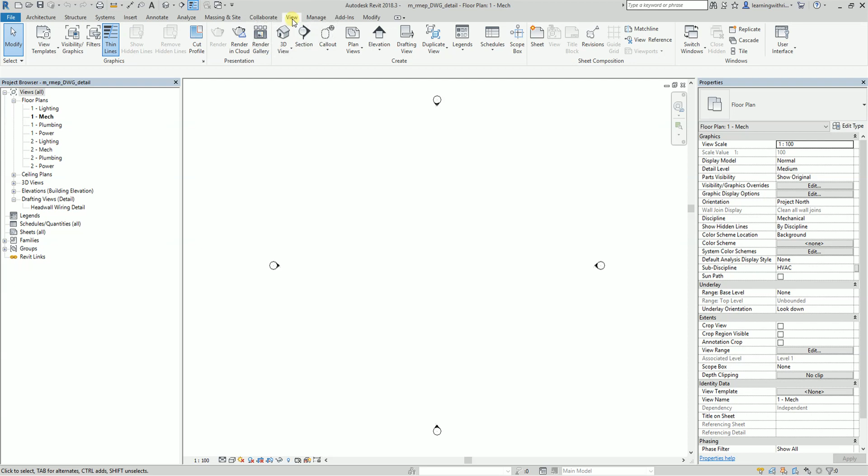But before we start, we are going to create a drafting view first, since we are going to import drawing details that we will use for detailing. To properly use that, you need to create a drafting view. Go to the View tab and select Drafting View. It creates a view showing details that are not directly associated with the building model, meaning any changes you make on the drafting view will not affect your 3D model, and vice versa.

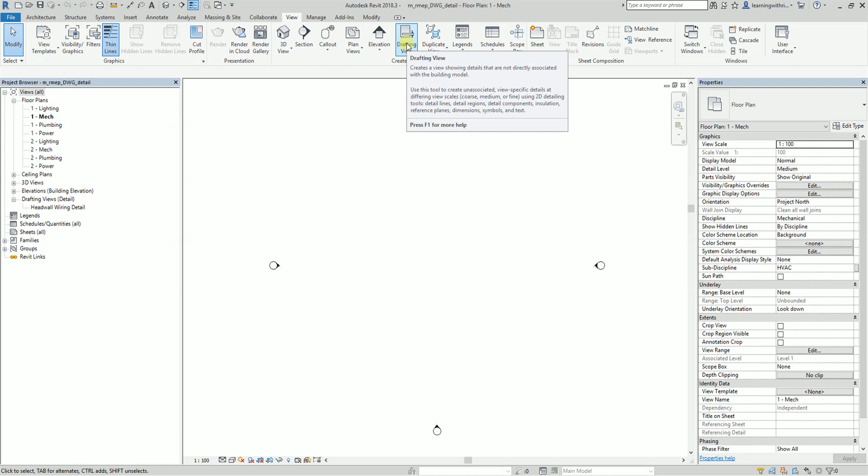Since you are going to use this CAD file to create a detailed view, you need to create a drafting view. I'm going to select Drafting View and specify the name. Let's call this HVAC curb detail, and select OK. Now you see the drafting view for HVAC curb detail.

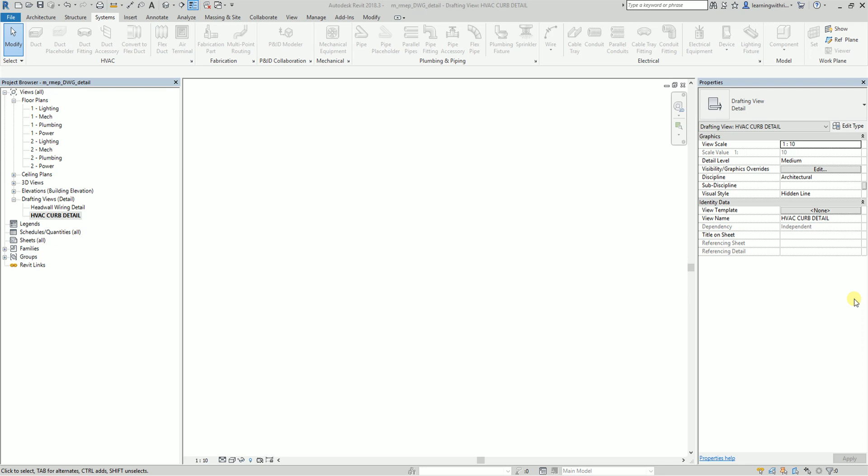You will also notice that if you go to Architecture, Structure, or Systems, all the 3D modeling tools are disabled, because drafting views are only a 2D drawing. So you will not be able to use your drafting view to create a 3D model. That's the reason why all the 3D modeling tools are disabled.

Now let us start importing our CAD drawing. You just need to go to Insert, then select Import CAD. Let's say this is the drawing that I'm going to use. But before anything else, before you select Open, I want to discuss the options we have here below.

When you say Current View Only, you will only see your CAD drawing on the current view—if you check this, you will only see your AutoCAD drawing on your drafting view, not in other views. If you uncheck this, you will be able to see your AutoCAD drawing not only on your current view but in all views, like section view, elevation view, and 3D view. Since we only want this on our detail, I'm going to check this one, so I only show this CAD drawing on my current view.

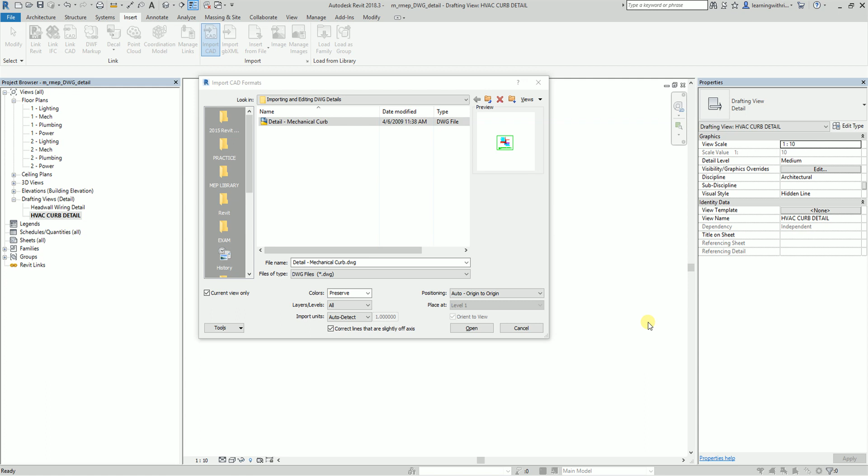Colors—it's up to you if you want to change your colors. You can select Invert: dark colors become light, light colors become dark. Preserve will keep the color of your AutoCAD drawing. Black and white will make your drawing black and white. For this exercise, I'm going to use black and white.

Black and white. There you go. Oh, by the way, before I import my CAD drawing, I just want to do this one.

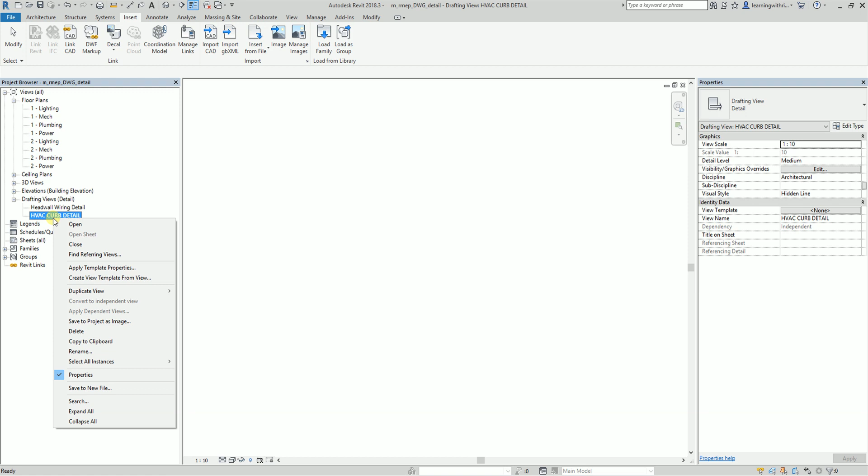I'm going to right click the curb detail here, and then apply a template. Let me just apply here a view template, apply template properties. I'll use the detail here, then select OK.

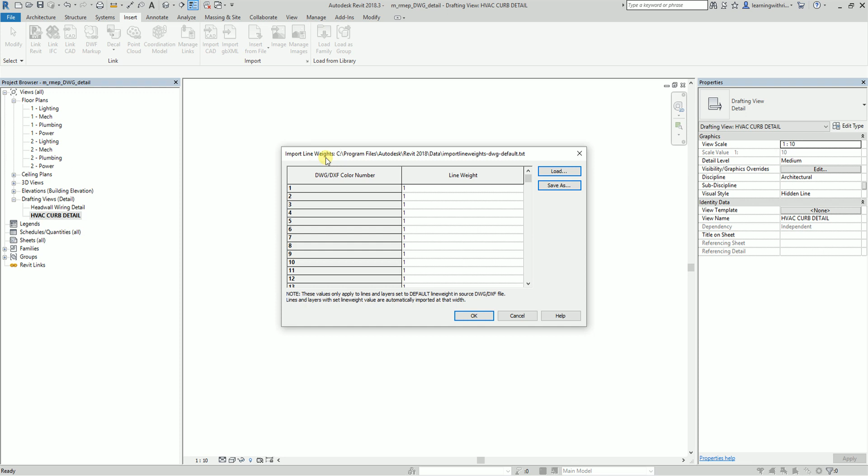After that, from the insert tab, there is this option here. If you click this arrow, it will expand your panel. If you click that, it will open the import line weights. From here you'll be able to import line weight to your Revit.

For example, for color number 5, I'm going to enter the line weight, let's say 4. This line weight equals to 0.3 mm at the scale of the new drafting view.

I'm going to select number 4, and then select save as. The reason why we are saving this is just in case you want to use this line weight again in another drafting view, you can load it. So if you save this, you can load this line weight again to another drafting view and another CAD file.

I'm just going to select save as. Let's say I'll save it here, and call it AOTC or whatever name you want, in case you want to save the import line weight file.

It's read only. I'll just close this, probably save it on my desktop. I'll save it here as AOTC, then save. After that, I'm just going to select OK.

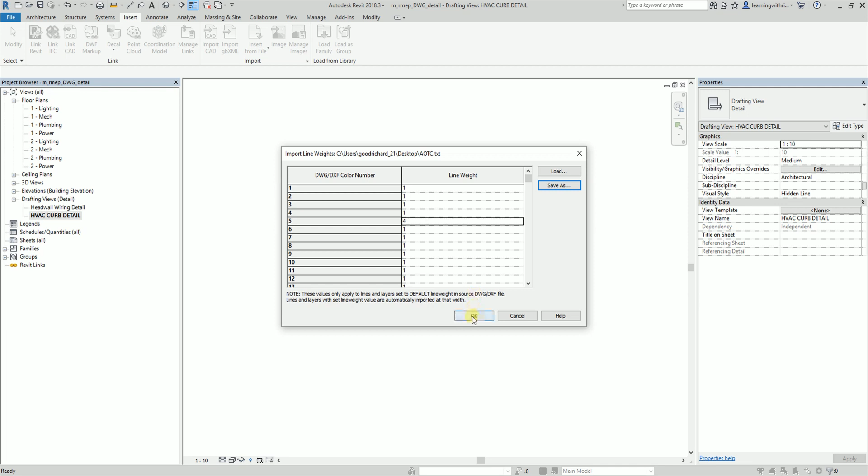After that, I'm now going to proceed importing my CAD because, like what I've said, you will be doing this also on the examination. You need to be familiar on how to save a line weight, and what options you are going to use in importing.

Okay, so let's now proceed on importing. I'll just go to the exercise. Where is that? This one. What's that chapter again? Chapter 4. All right, chapter 4, this one.

So black and white. I'll just put it on the current view, at the center. So auto center to center. All right, I'll select auto center to center.

After that, I'll need to select open. By the way, when you say auto center to center, it means it places the drawing or the imported file at the center of the Revit MEP model. The center of a Revit MEP model is the center of the bounding box around the Revit MEP model. It will just place it here at the center.

The other one is auto origin to origin. It allows the Revit model that you import and the model that is created to share the same origin. This is useful if you are importing a plan, a floor plan. But since this is just a detail view, I'll select auto center to center, and then select open.

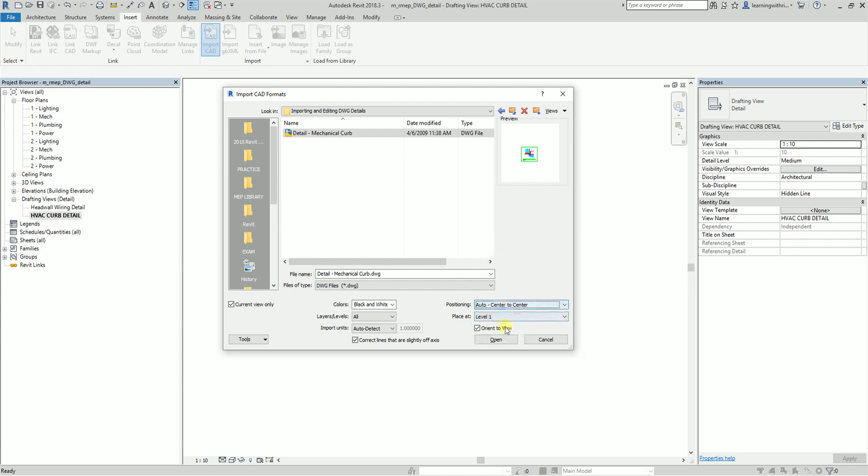Right. So after importing, that's it. After you import your CAD drawing, as you can see, it's now here and it's black and white, because that is what we have selected.

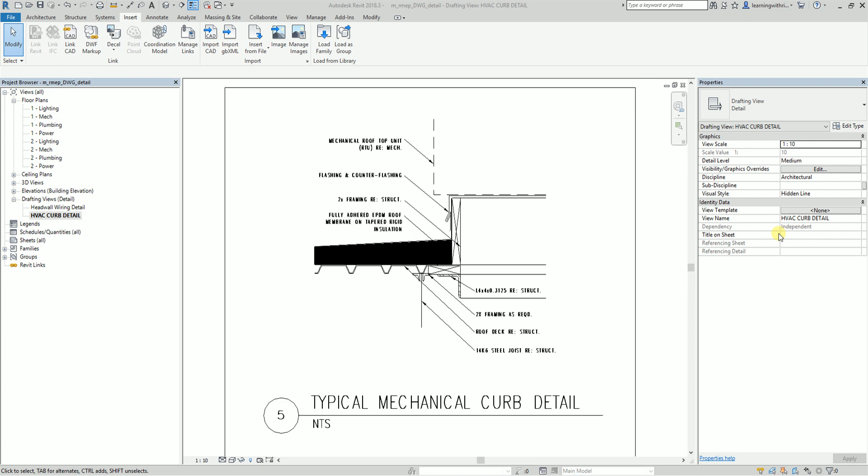Notice that the leader lines in the AutoCAD file retain their defined line weight when imported to Revit. Before importing, if you remember the AutoCAD file, we specified the line weight for elements on layers with blue color. Therefore, the steel joist and flashing in the import symbol are slightly thicker than the leader lines and much thicker than the other lines.

So for us to be able to see that, I'm going to turn off the thin lines. There you go. You see, this is the one that we have changed a while ago.

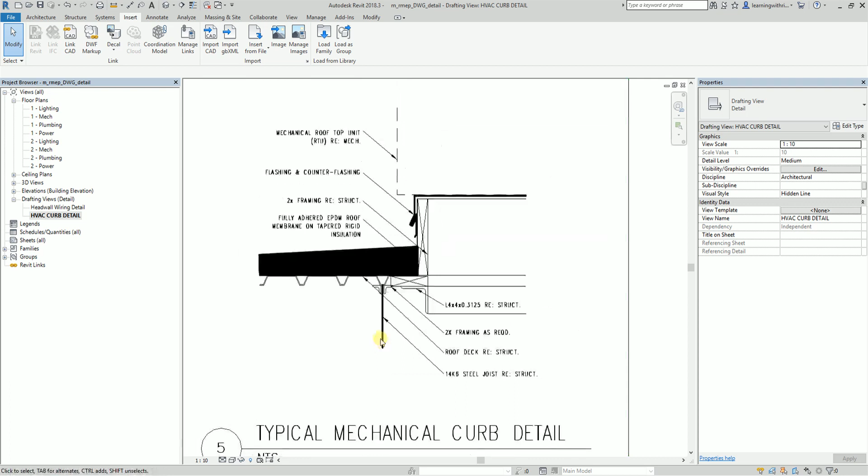This is color number 4. We changed it to 4, that's why it was applied here. Remember this one, right? We make the color number 5 into 4. That's why you see this is the one.

The steel joist, which is this one, as well as the flashing and counter flashing, are slightly thicker than the leader lines and much thicker than the other lines.

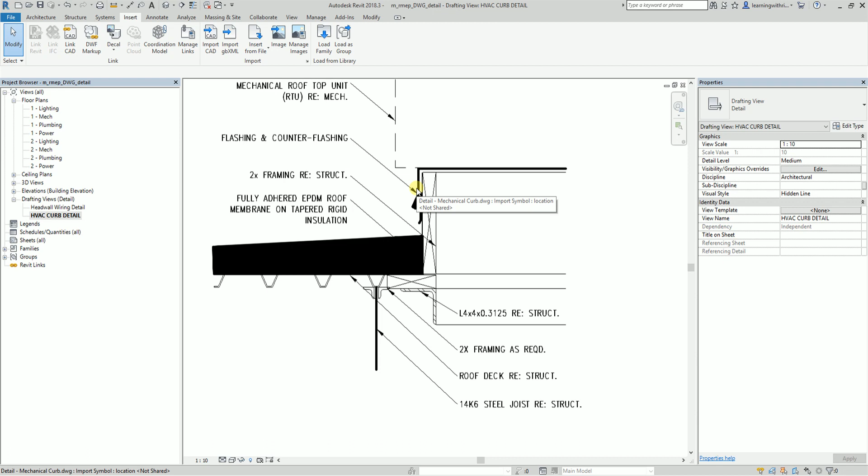Now let us try to do some editing on our drawing details. If you want to do some editing, what you can do on the examination, there's this question that will ask you what is that particular layer. Let's say you want to know what is the layer of this line.

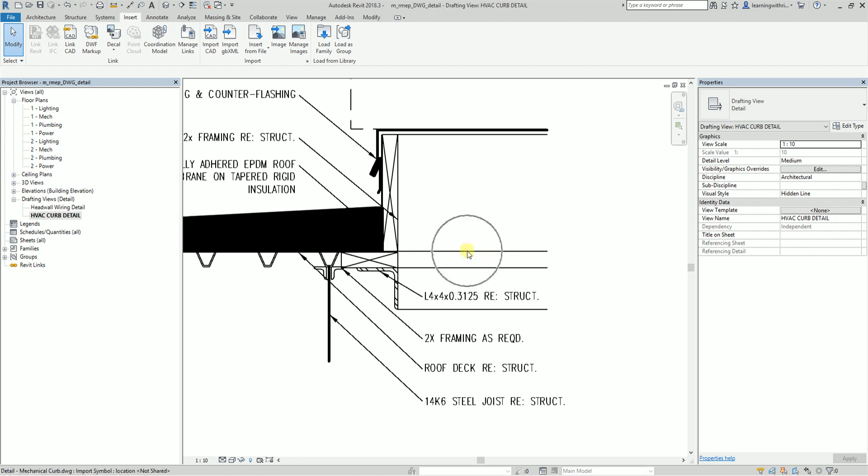What you can do is simple. You just need to select the drawing. You did this on the exam, you select the drawing, and then you will see here query. There's an option there, query.

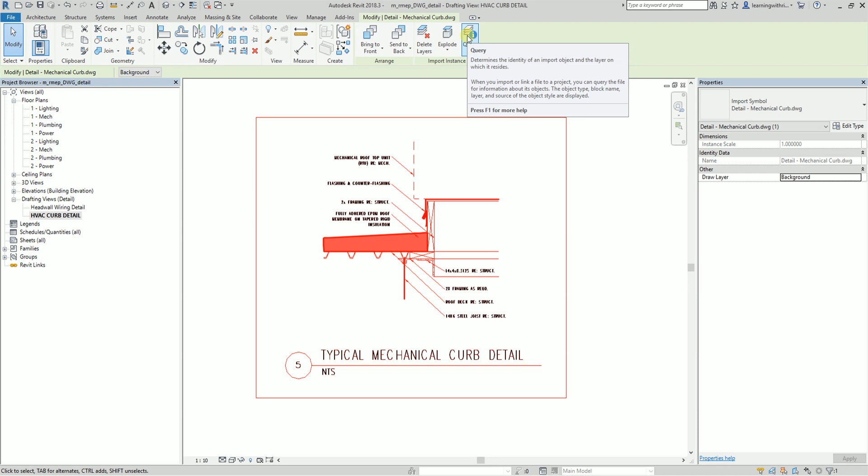This determines the identity of an imported object and the layer on which it resides. Just click on it, and if you want to know the layer, click that, and you will now see the property, including the name of the layer, which is 'A-Detl-Wide'.

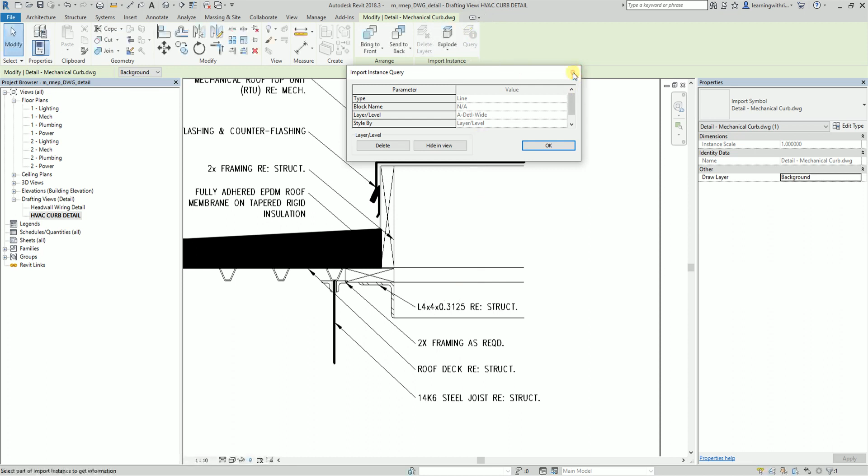During my exam, I was asked the layer name of a particular line. To find out, select the AutoCAD drawing, then select query, then click the line. You will now see the name of that particular layer.

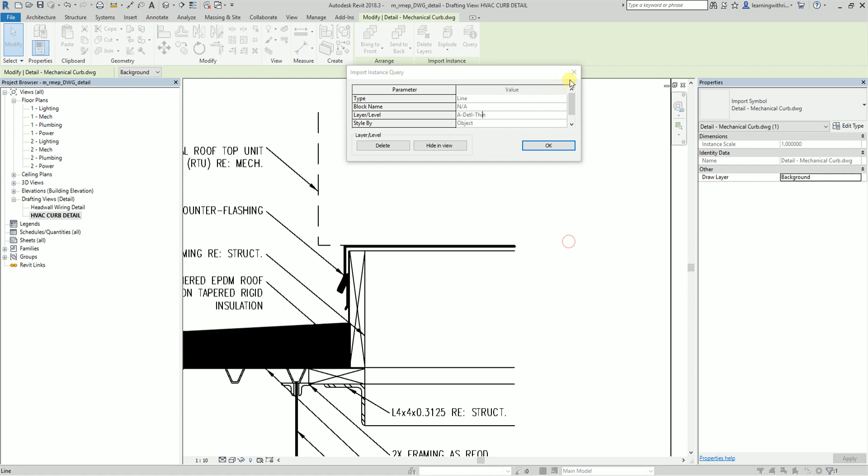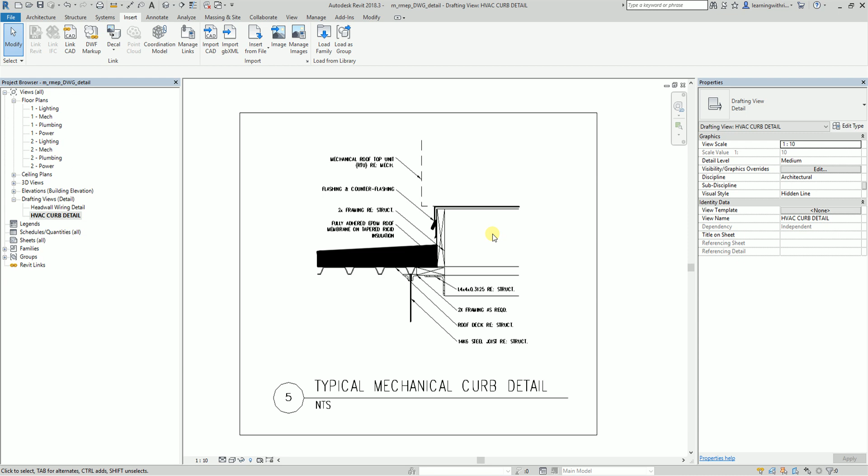Another option is you can also explode your AutoCAD drawing if you want. But before you explode, you can check the layers by typing VV or VG to open the visibility graphic overrides.

Go to imported categories, and from here you will see the drawing you imported. If you expand it, these are the layers available for that AutoCAD drawing. From here you can also control the visibility of those layers, and of course change the color.

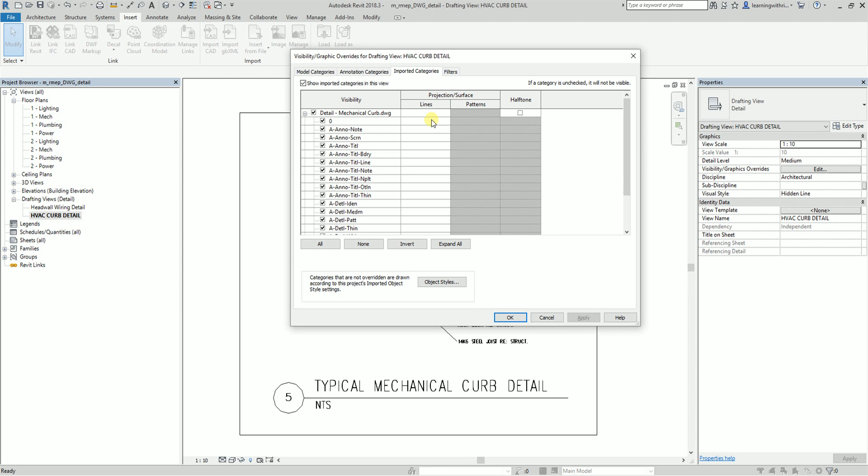Let's check the name of the layer of this thick line. I'll select query, then click the line. I can see the name is 'A detail medium'.

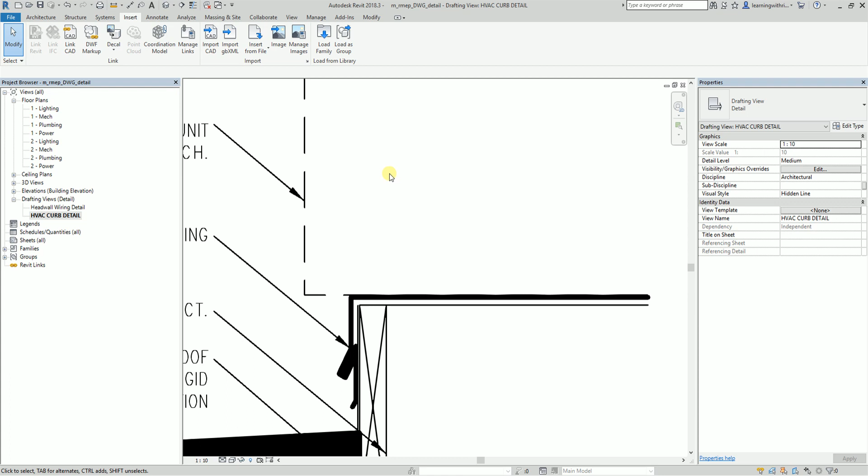Let's say I want to change its color. To do that, type VV, go to imported categories, expand this, and look for that layer. There's an option here to override it. Click this, and you can change the line weight or the color.

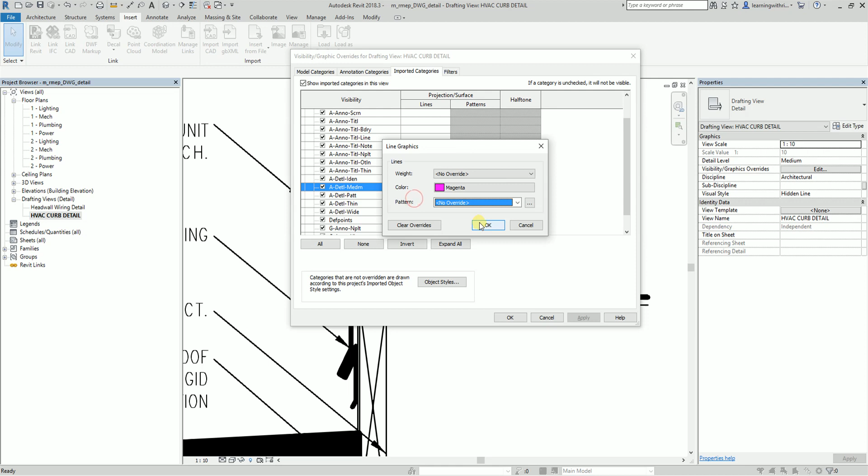Let's say I want that color to be magenta, that's it. You can also change the pattern if you want. Then select OK and OK again, and you will now see it change. So that is another way of checking and editing your imported drawing.

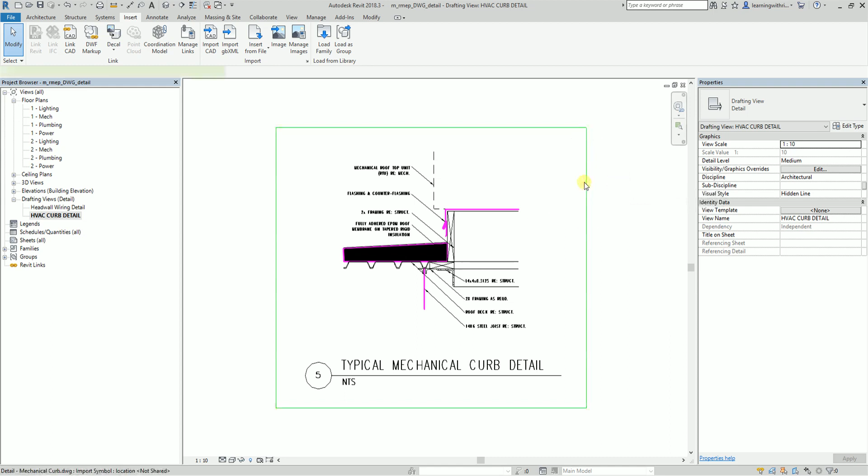Another way is you can also use the explode tool. For this, select your AutoCAD drawing again, and you will see explode. It disassembles the import symbol one level to its next highest level of elements.

You have two options: full explode and partial explode. A partial explode breaks up the import symbol into individual object blocks, whereas full explode breaks the import symbol into text, curves, lines, and filled regions. That's the difference between the two.

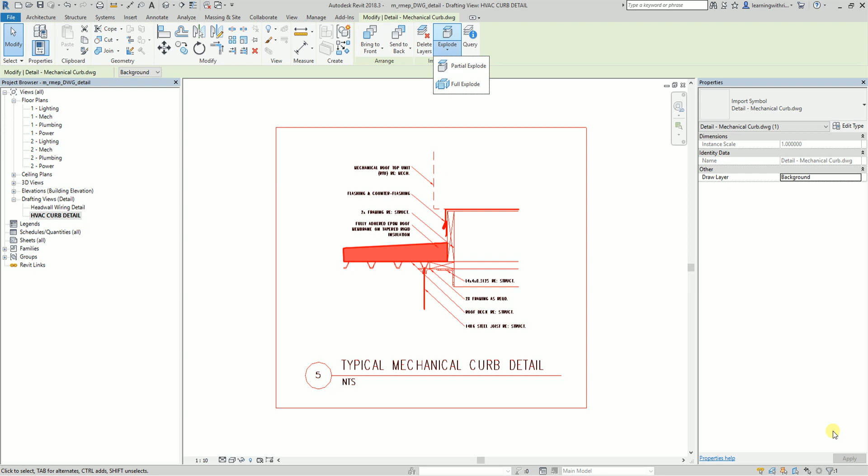Let me try to explode it. I'll select the AutoCAD drawing and select partial explode. So what will happen is it will explode like this, and of course you can still modify this.

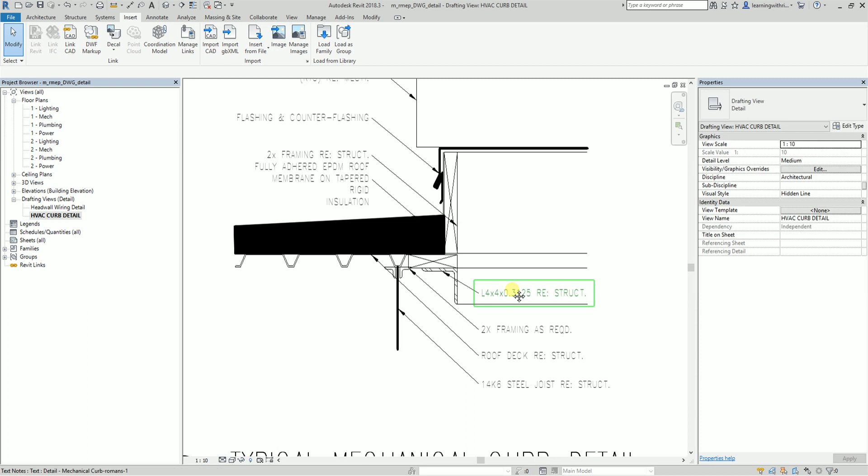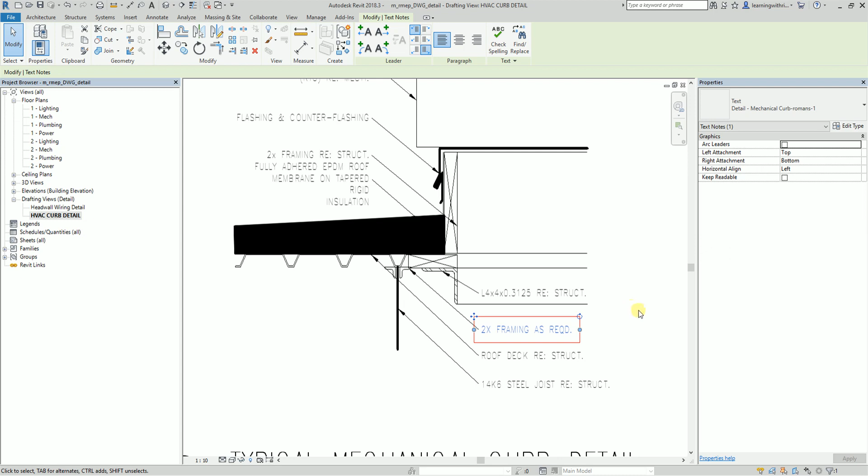If you want to modify the text, select the text, then select edit type, and from here you can modify it again. You can modify the text of your CAD drawing inside Revit after you explode it. Notice this portion here, I can't select it individually because I only exploded it partially.

But if we explode it fully this time, it's now completely exploded into lines, circles, and text like that. So now it's fully exploded.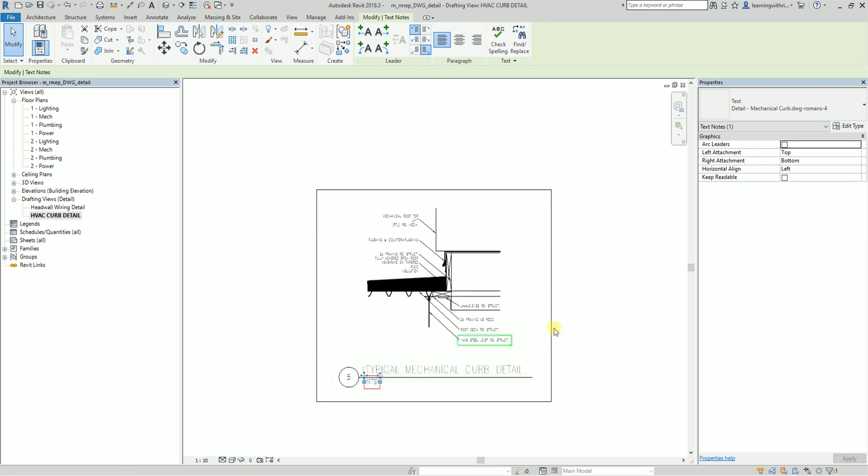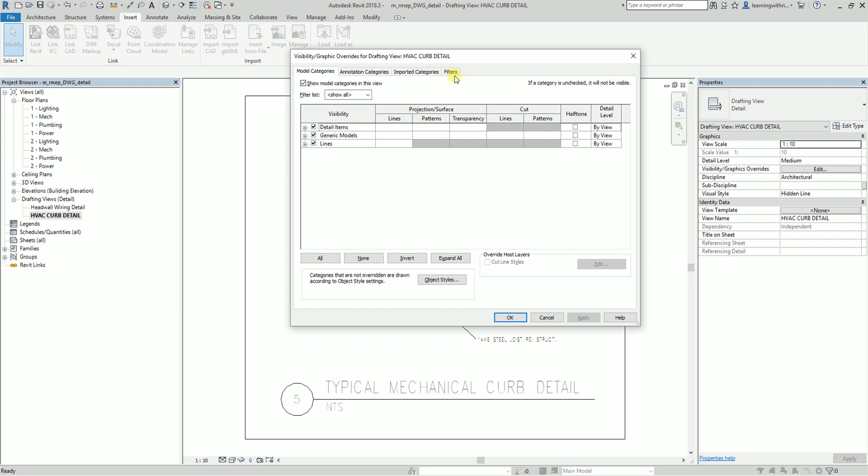So basically that is how you import a detail into your Revit. The first step is to create a drafting view, then import the detail or apply the thickness you want. You can always go to the visibility/graphics overrides, and from here override the line weight, line type, and thickness of your AutoCAD details.

That's it for our first topic for the collaboration, about importing and editing a drawing detail.